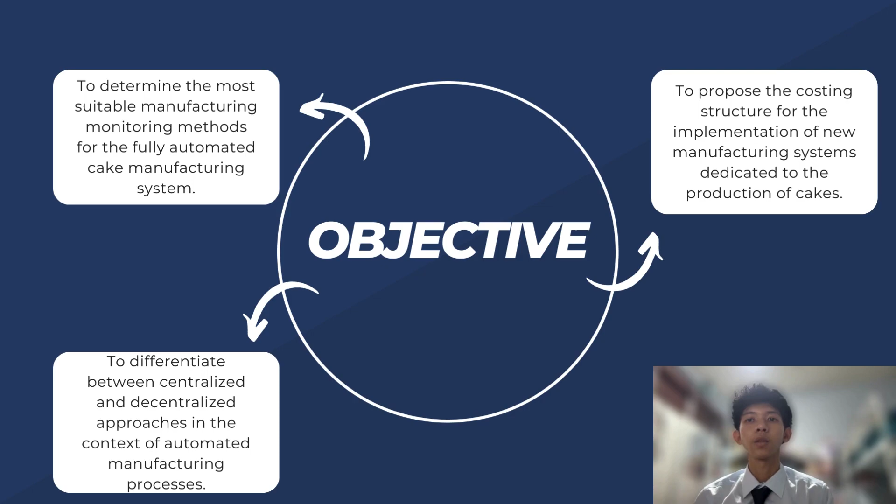For this part, I will explain briefly our literature review based on our reports. First is centralized automation. The centralized method allows for more effective resource allocation, uniform processes, and the employment of robot arms for hazardous activities.

Second is decentralized automation. Decentralized automation in baking cake factories may entail the spread of control and decision-making processes, taking lessons from decentralized models in supply chain and manufacturing systems.

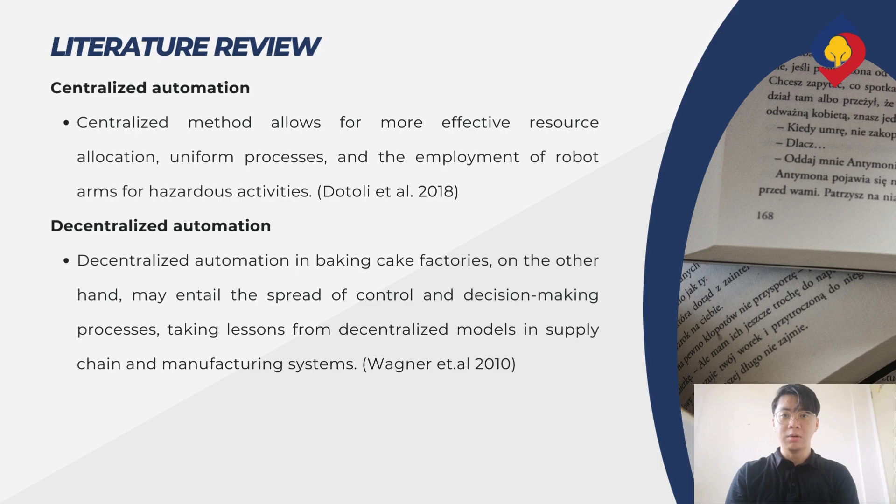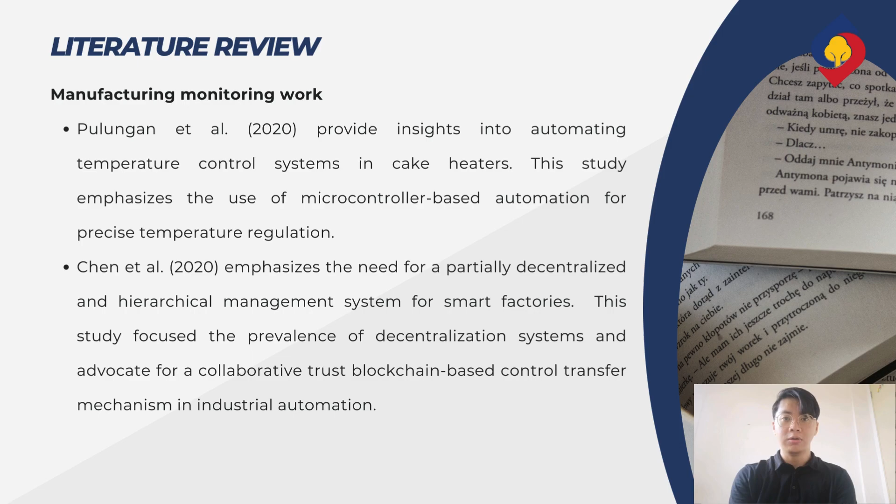The second part of our literature review is about manufacturing monitoring work. Pulungan et al. 2020 provide insights into automating temperature control systems in cake heaters, emphasizing microcontroller-based automation for precise temperature regulation. Chen et al. 2020 emphasized the need for partially decentralized and hierarchical management systems for smart factories. These studies focus on the prevalence of decentralized systems and advocate for collaborative trust blockchain-based control transfer mechanisms in industrial automation.

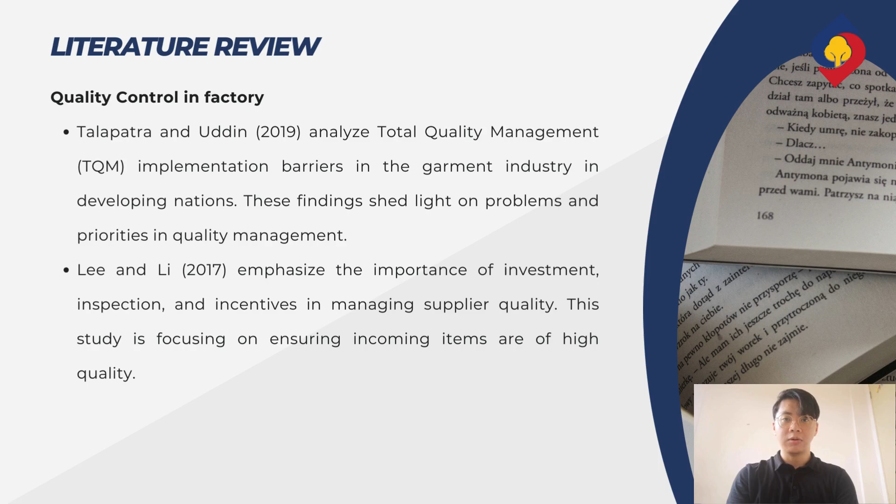Talapatra and Uddin 2019 analyzed total quality management (TQM) implementation barriers in the garment industry in developing nations, shedding light on problems and priorities in quality management. Lee and Li 2017 emphasized the importance of investment, inspection, and incentive in managing supplier quality, focusing on ensuring incoming items are of high quality.

Next, I'll talk about monitoring work done during the manufacturing process. Manufacturing monitoring refers to the systematic and ongoing process of overseeing and controlling various aspects of the production process in a manufacturing setting. The primary goal is to ensure that manufacturing operations run smoothly, efficiently, and in accordance with established standards and objectives. Monitoring can be classified into two types: monitoring for variables and monitoring for attributes.

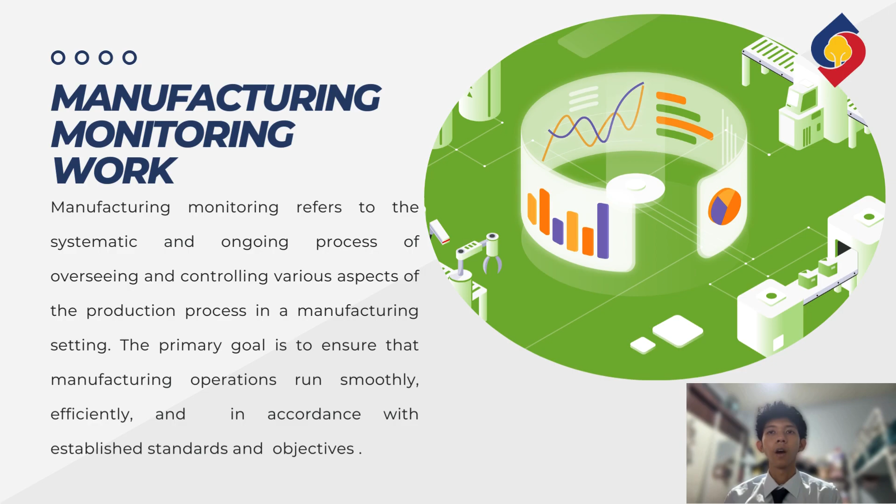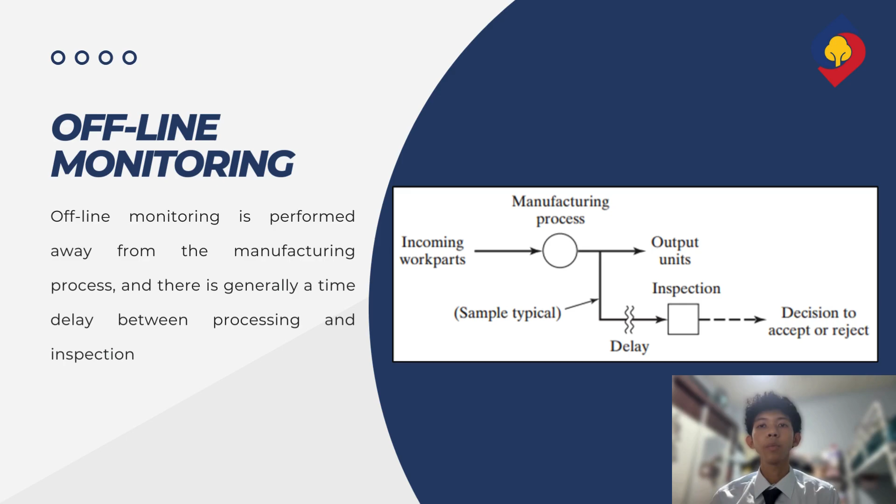The three monitoring methods are: first, offline monitoring; second, online in-process monitoring; and third, online post-process monitoring. Offline monitoring is performed away from the manufacturing process, with a time delay between processing and inspection, normally done using sampling methods. From the figure, assume the incoming work parts are raw ingredients of the cake. It goes through a series of processes to be produced into a cake. After cake production, the cake goes through offline monitoring before packaging is executed. A decision is made whether to accept or reject the cake from the monitoring.

Next, online in-process monitoring is done during the manufacturing operation. The monitoring procedure simultaneously measures or gauges the dimensions as the parts are being made. Based on the figure, the ingredients are processed and simultaneously monitored before the cake is fully produced. As a result, problems with product quality can be changed and resolved before it is finished, since data from the monitoring process is collected concurrently with the manufacturing process. Some sensors used in this case are thermal sensors, weight sensors, and a visual inspection system.

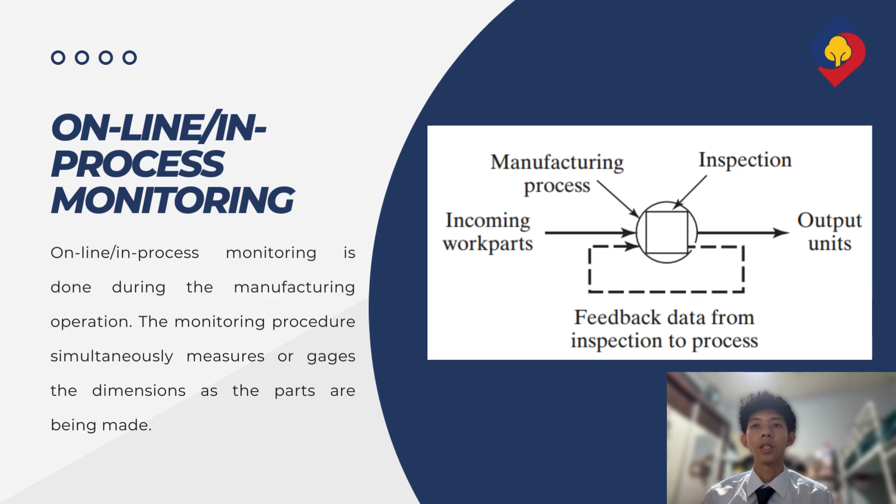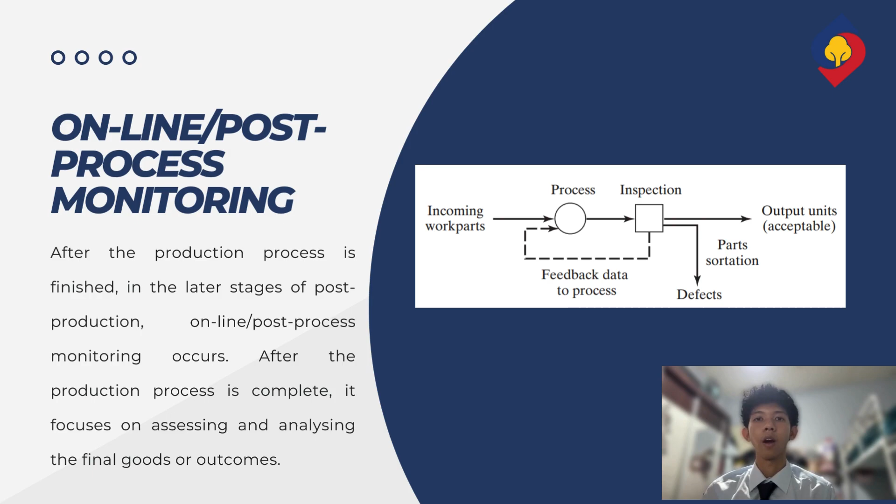Lastly, online post-process monitoring occurs after the production process is finished, in the later stages of post-production. It focuses on assessing and analyzing the final goods or outcomes, involving gathering information about the features, quality, and performance of completed goods. The fact that this is integrated with the manufacturing workstation keeps it classified as an online technique. The raw ingredients are processed and inspected right away, leading to the sorting of cakes that are acceptable and those that are defective.

Manufacturing system is one of the important parts, as manufacturing system refers to a gathering of human resources and equipment which is designed to carry out the processing and assembly operations on a starting material or part to produce a final product.

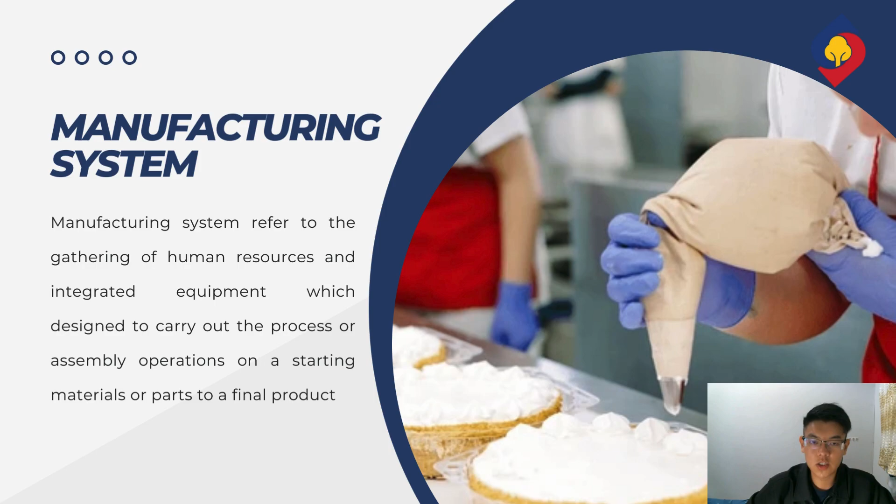In the manufacturing system, we have involved group technology. Group technology, also known as an approach in which similar parts are identified and grouped together. The benefits of group technology to our company include improved productivity and manufacturing efficiency, which reduces lead time. Group technology is also highly recommended as our company needs high in-process inventories.

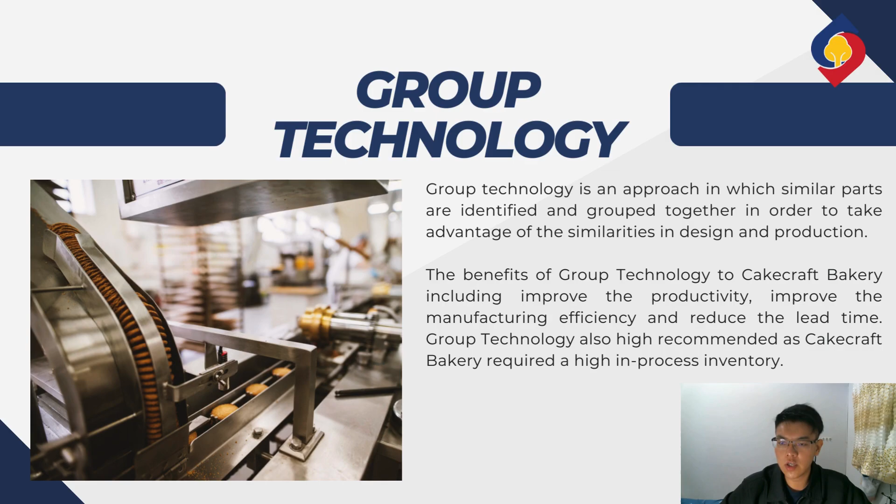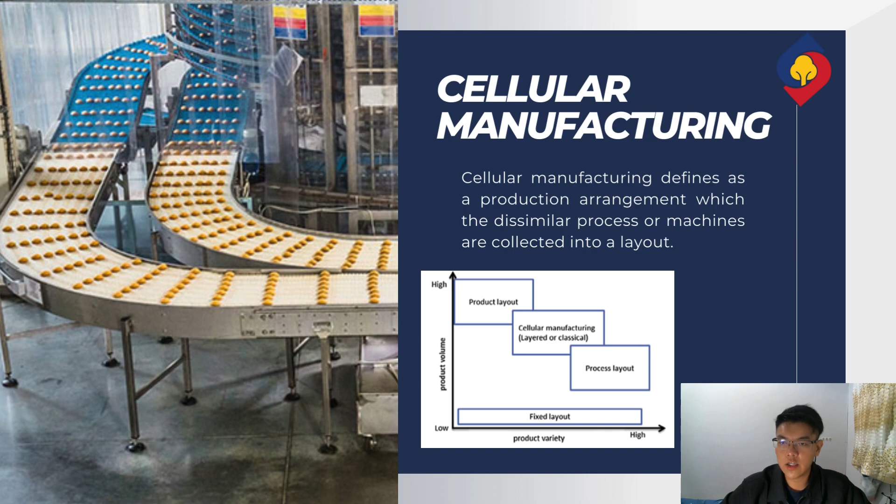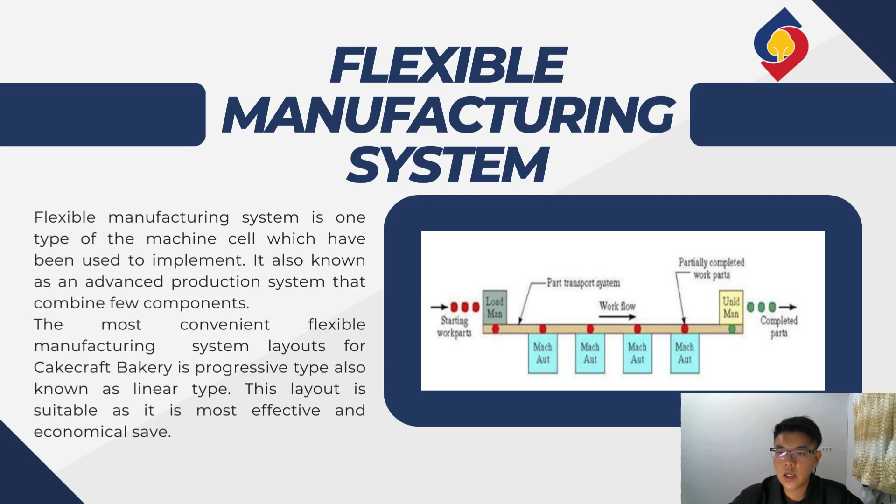In our proposal, cellular manufacturing is the most suitable layout, as product varieties and product volume for our company are in the medium range. Flexible manufacturing system is one type of machine cell which has been used to implement this. The most suitable flexible manufacturing system in our proposal is linear type, as it is more efficient and economically safe.

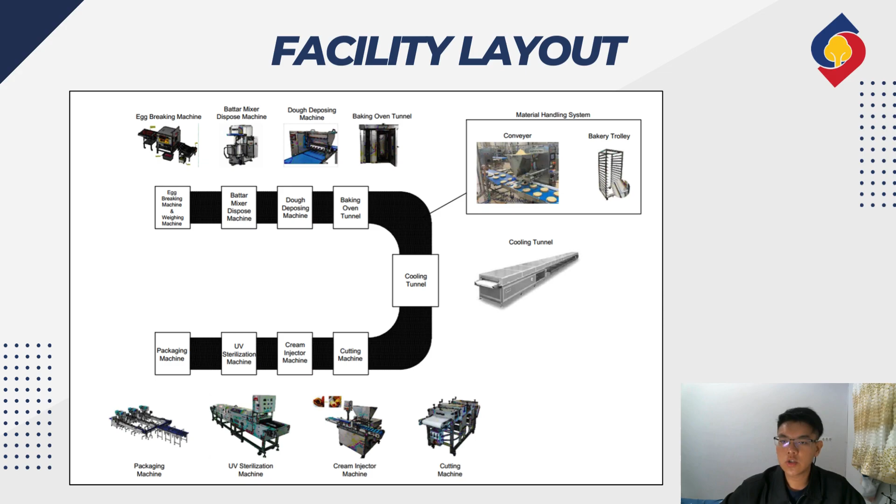The figure above shows the flowchart of our proposal for this manufacturing system. It involves a few machines, such as egg breaking machines, mixer machines, dough deposing machines, oven, cooling tunnel, cutting machines, cream injector machines, UV sterilizing machines, and packaging machines.

In this proposal, the manufacturing system and machines will be located at the middle of the industry. The office, meeting room, storage, and others will be located at the side of the industry, as shown in this diagram.

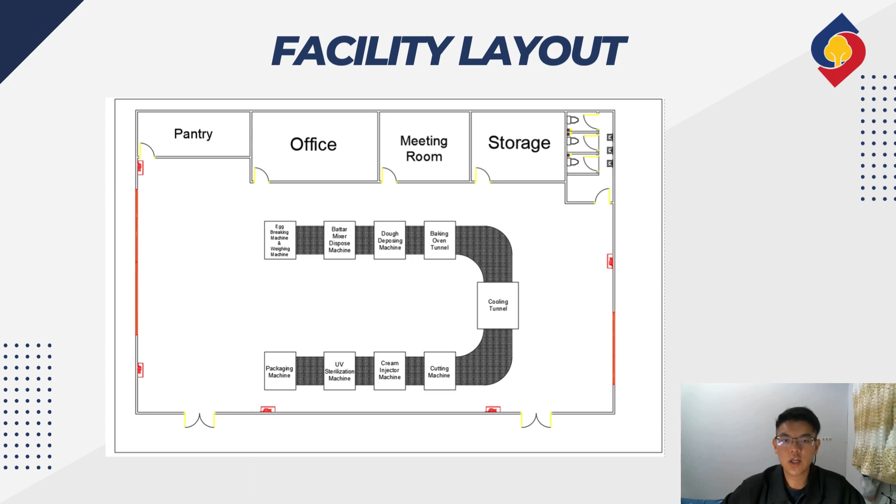Furthermore, our proposal for the lead time of a single process is estimated to be 200 minutes. The production of cake units is estimated to be 360 units of cake per day.

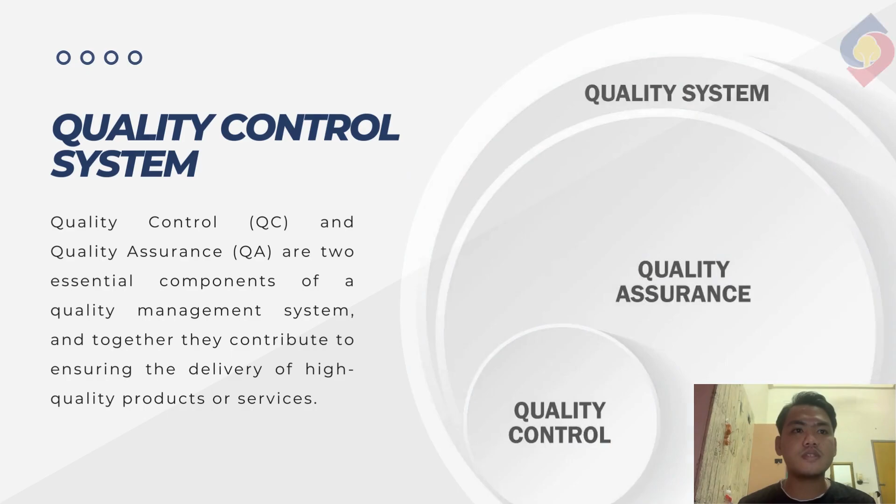Quality control system: Quality control and quality assurance are two essential components of the quality management system, and together they contribute to ensuring the delivery of high-quality products or services. In the context of cake manufacturing, the Taguchi method can be employed to enhance the quality and consistency of the final product.

Here, we must identify the parameters of making the cake. For example, we must know the ingredients to make the cake: the amount of flour, amount of egg, amount of baking soda, amount of flavoring, sugar, milk, olive oil, and butter.

To ensure cake quality, we must monitor several aspects including baking temperature, baking time, sugar amount, flour quantity, butter quantity, mixing speed, and ingredient balance. These aspects are all just to make sure the cake we make has good quality.

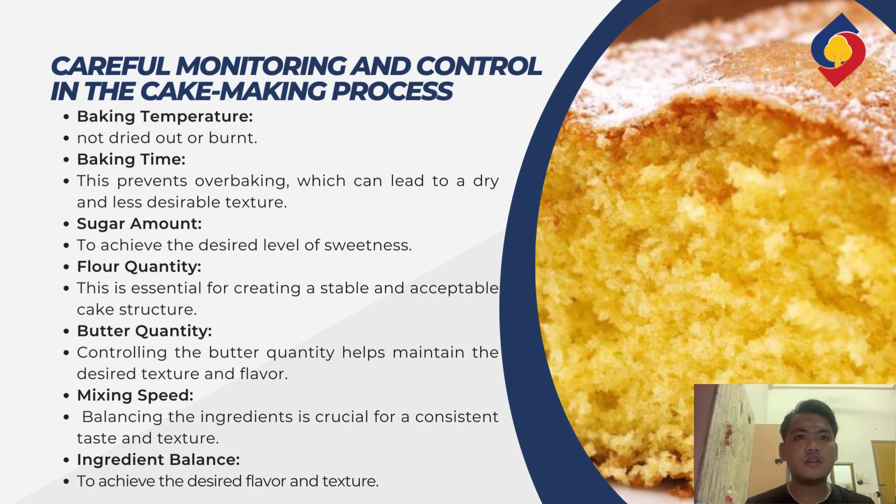For inspection technique, we use a few types of sensors to make a cake. First, we use a metal detector to detect metal in the ingredients.

Second, we use a proximity sensor to identify the objects in close proximity. Third, we use a thermal sensor to monitor the temperature during the baking process. Last, we use an infrared sensor to measure the final dimension of the cake.

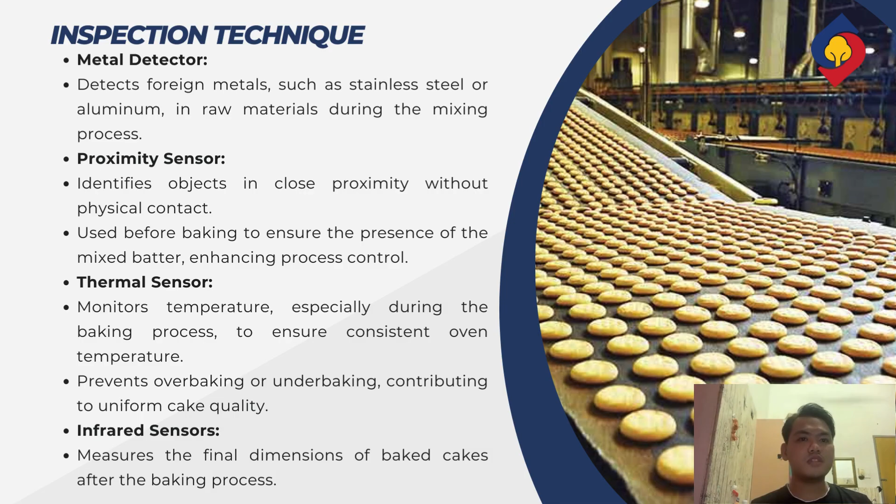What is a centralized automation system? Centralized automation system in a cake baking factory refers to the integration of various automated processes and controls into a single centralized system to manage and monitor the production of cakes. This central hub serves as the brain of the automation system, coordinating and managing the connected devices or systems.

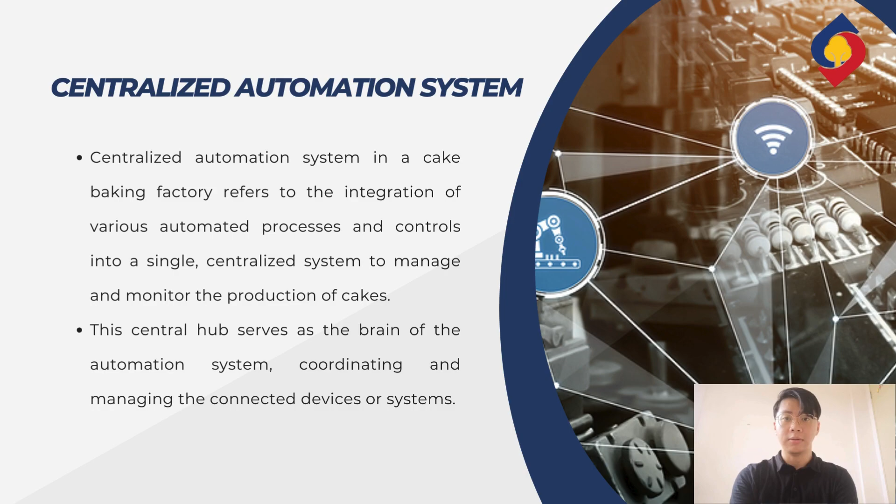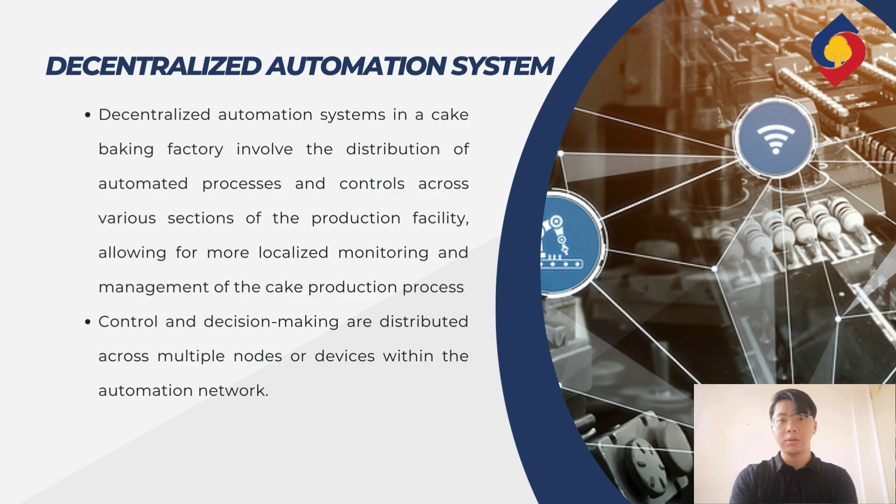What is a decentralized automation system? Decentralized automation system in a cake baking factory involves the distribution of automated processes and controls across various sections of the production facility. This allows for more localized monitoring and management of the cake production process. Control and decision making are distributed across multiple nodes or devices within the automation network.

In our proposal, Craft Bakery will start to earn money when 35,265 units of cake have been sold out, with the price of 30 ringgit each.

In our proposal, the total annual cost estimation is 1,057,946 ringgit. However, in our research, the craft bakery can produce 7,200 units of cake in a month, which can carry a benefit of 1,534,054 ringgit in a year.

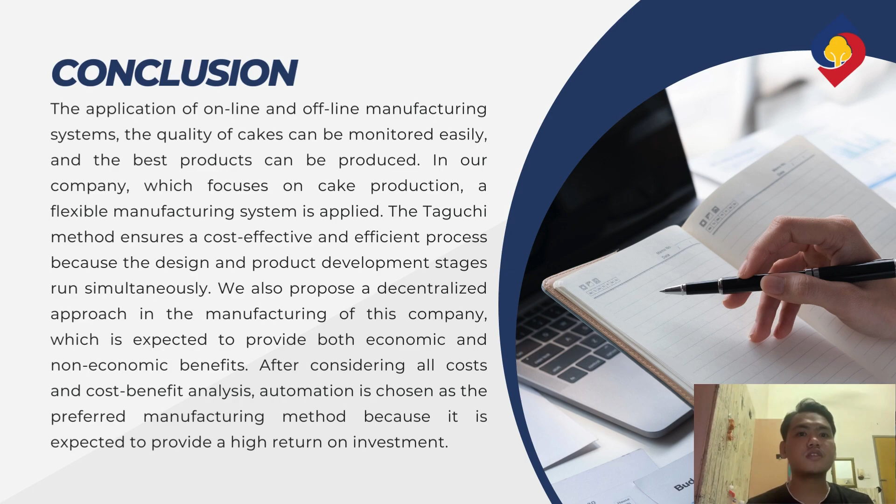We also propose a decentralized approach in the manufacturing of this company, which is expected to provide both economic and non-economic benefits. After considering all cost and cost-benefit analysis, automation is chosen as the preferred manufacturing method because it is expected to provide a higher return on investment.